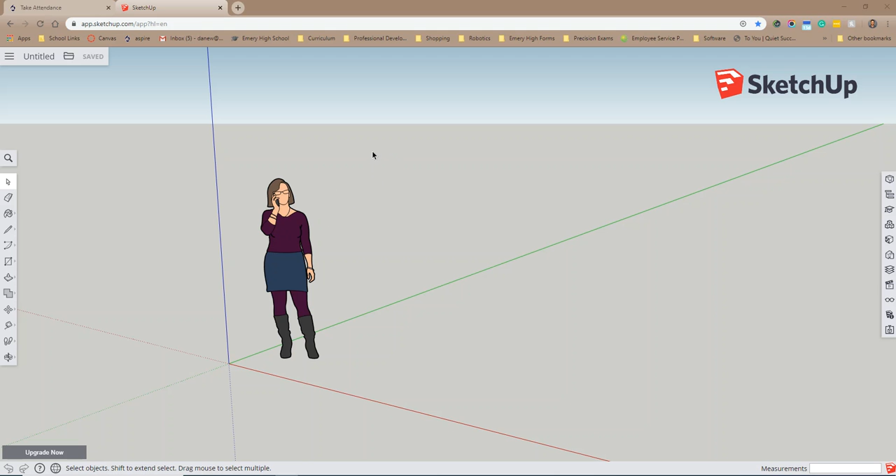To start out with, they have a sprite. You can delete that sprite by clicking and dragging a box from right to left to select it, then pushing the delete key on your keyboard.

Alright, a couple things about SketchUp: it's free, well this version at least, and it's good for small projects.

On the left, we have our select tool, an erase tool, a paint tool, a line tool, an arc, a rectangle, and if you right click on these, or just click the arrow on the right, it'll give you more options. So we have all these different tools.

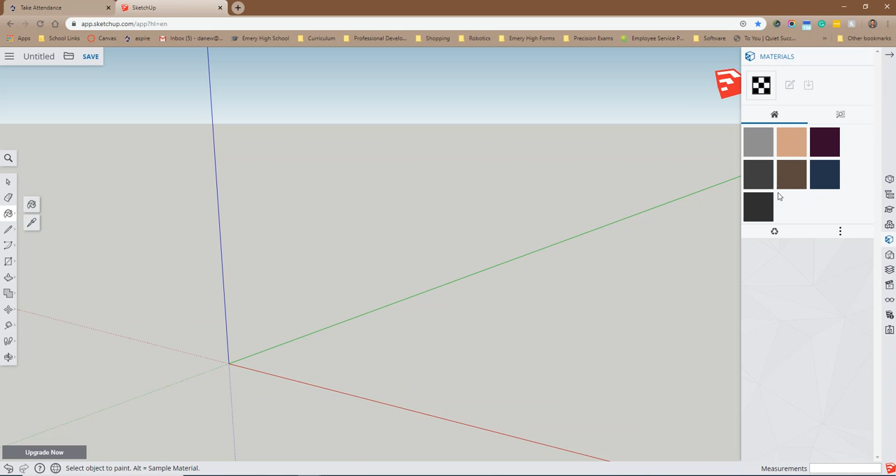When you select a tool, like say I selected the paint bucket, it'll give you some options on the right regarding that tool. I can select some different colors here, or even find some materials to use.

Okay, so to navigate, I'm going to hit the select tool here. Just to zoom in and out, you scroll with the scroll wheel in and out.

To pan, you have to click down here on this orbit tool and select the pan option. This is the only thing I don't really like about SketchUp, that you have to go over here to pan. Maybe there's a shortcut, I don't know if there is, let me know. But now I can pan. If I click the scroll wheel and hold it, I can orbit.

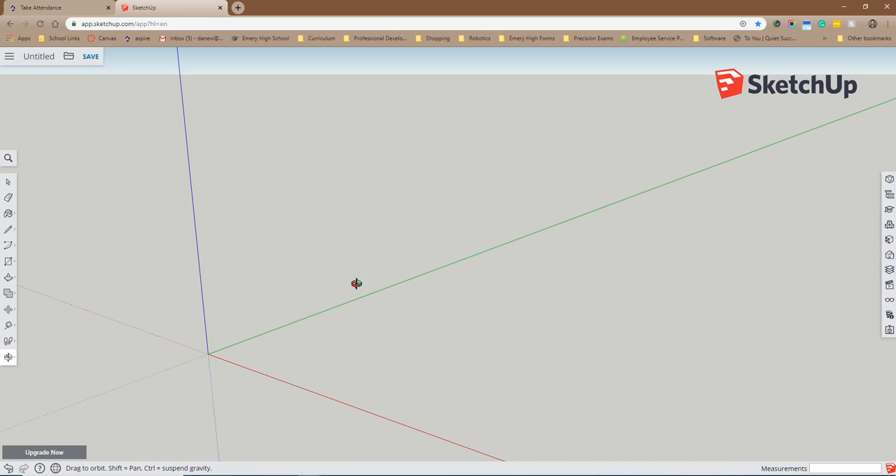So that's a little bit about navigation. Okay, so let's talk about our design that we're going to be doing.

Here's just a rough sketch that we made, very rough, with some rough dimensions. We're making this doghouse for a mini Aussie, and we looked up the sizes recommended for a dog that size. We came up with a 24 inch by 30 inch by 36 inch structure, with a 12-inch door.

So this is a rough idea here, and it has a gambrel roof, kind of like the old barns that had two pitches. Very rough, the annotation isn't right or anything, just to give us an idea.

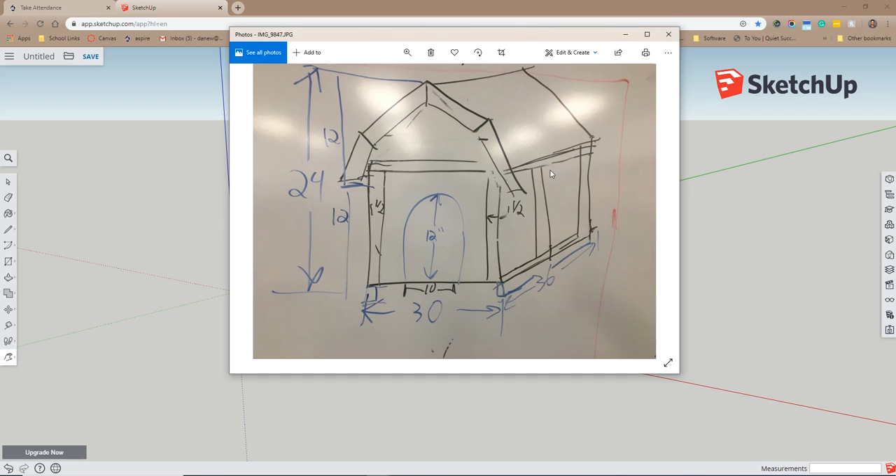For a structure like this, we're going to want to start by making a floor, and the floor will consist of joists and a rim joist to hold it all together. So for example, here's a floor, with a rim joist that the joists will nail into, on each end of our joists, and this will be like a platform frame where we'll build off of this.

We'll be able to have some insulation in here. It'll keep the house up off the ground, so we won't get the cold from the ground or the heat from the ground coming up into the doghouse. So that's our goal, is to make this part.

Okay, so to get started, what I like to do is scroll in, zooming in to where all the axes meet. There's a green, blue, and red axis. We want to start drawing. I like to use the origin here as my starting point, so I'm going to select the pencil tool.

Before I actually click and start drawing, we need to know the size of our wood. We decided to make this really lightweight, and we didn't want to use 2x4s, so these are 1x4s. If you look at the actual size of them, here's a little chart. A 1x4 is not really a 1x4, just like a 2x4 isn't really a 2x4.

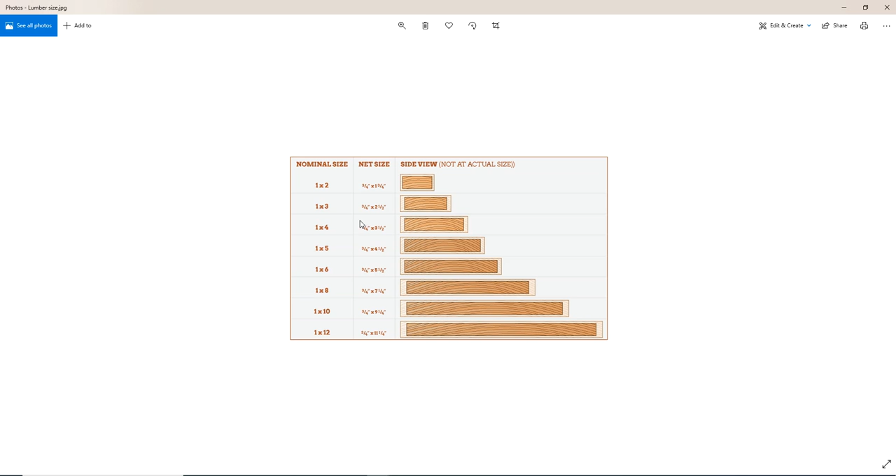A 1x4 is actually 3/4 inch by 3.5 inches. So those are the dimensions we're working with for our floor framing, with the joists and rim joist.

So let's go back to our sketch. We'll start by drawing our first joist. If I click and let go on the origin and drag up, you can see that there's a line kind of following my pencil around. That line is on that blue line. You can't really see it. In the bottom right, it's giving me some length options. So if you look as I move it, it changes.

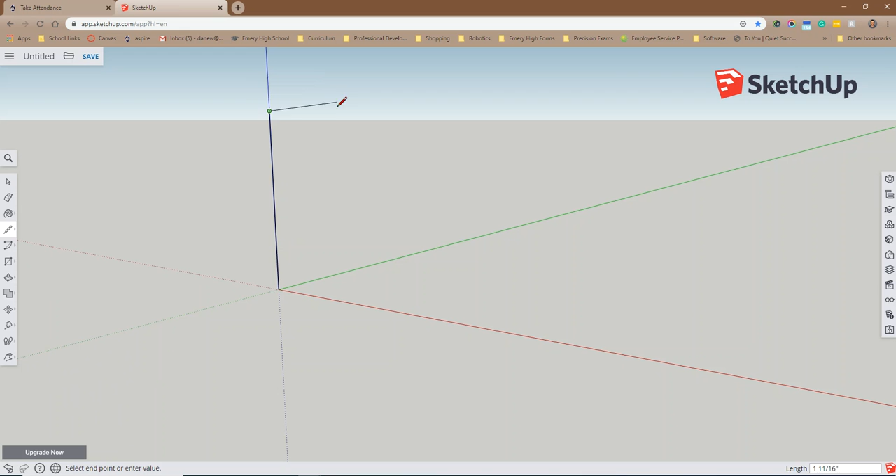We want to set our length, which for a 1x4, it's not really 4 inches. It's going to be 3.5. So I could type this as 3.5 if you look in the bottom right. Or I could do 3 space 1/2. So either of those will work, and then hit enter. Okay, so it drew, and I'm zoomed in enough that it looks like it's really big. That's because I'm zoomed in. If yours is small, then zoom in a little more.

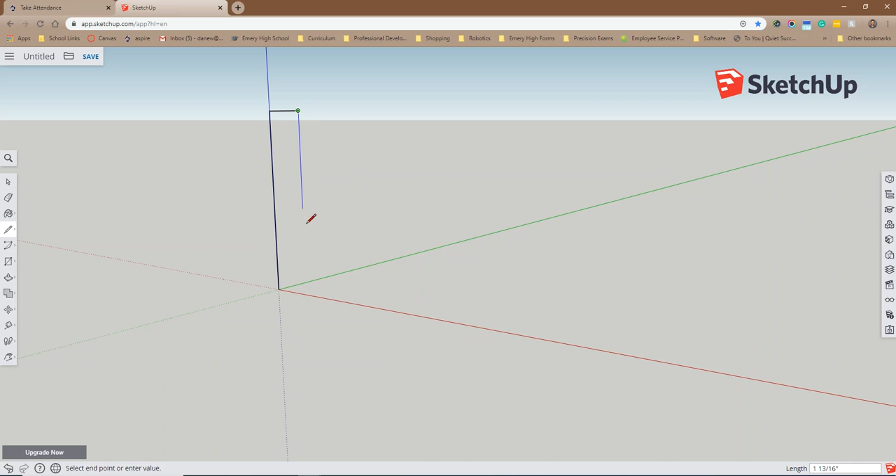I'm going to go to the right till my line turns red. That shows that it's following this red axis below. And we're going to make the width now, which is 3/4 of an inch. So once again, I could type 0.75, or I could type 3/4 and hit enter. Now I could type in again the length, or I could just go down until it snaps to this axis, and then I could click and snap it to where we started.

When I connect all those together, it makes one solid polyline, and it fills in the center. If it didn't fill in the center, it means that there's a gap somewhere. It's not a closed loop. So this is what we want, this closed loop that is 3/4 inches thick by 3.5 inches tall.

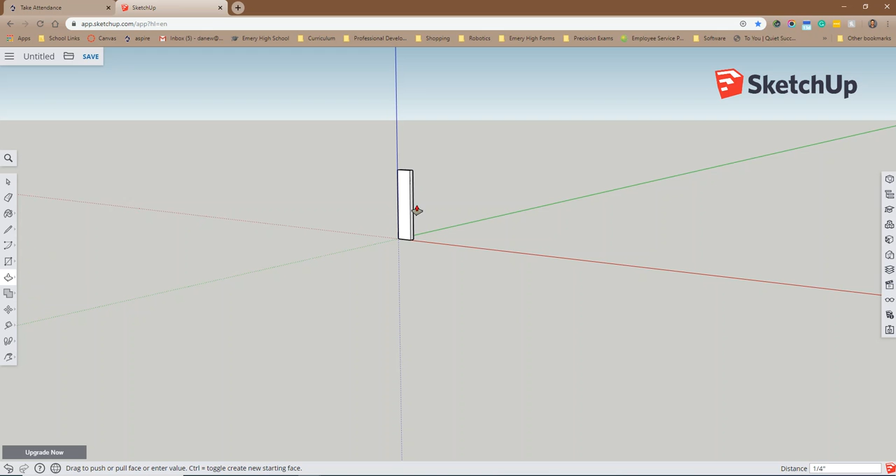Now that we have that, we can actually extrude our board. So I'm going to come over here to the left, and there is a push-pull tool that allows you to extrude. So if I click on that and select the blue area, click and let go, I can now push or pull that shape into a three-dimensional object. Now once again, in the bottom right, it's showing us a length here. If you remember back to our original drawing, we're doing this one here, so the length is going to be 36 inches. So I'm going to type in 36 and enter. And now I have my first board.

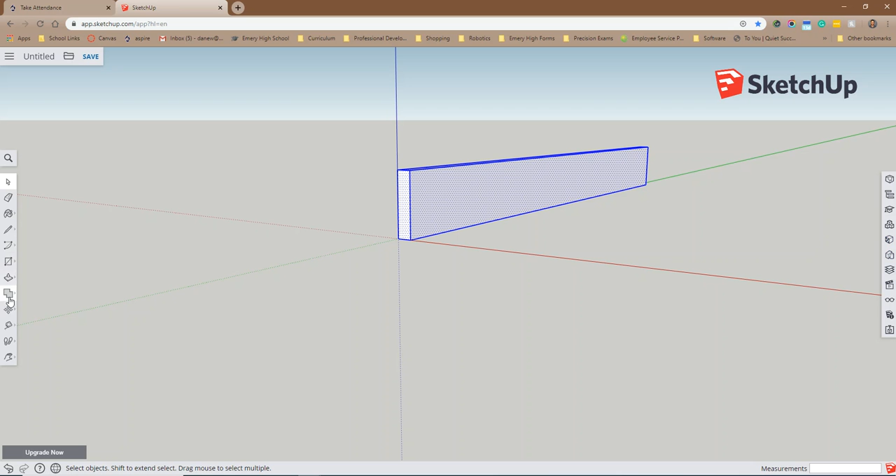Now, not quite done yet with this board. What I want to do is do my select option on the left, click and hold and drag a box from the right to the left till you've selected the entire board, and let go. It'll select everything. And we want to go over to our left and pick the paint bucket, and then to our right, and yours might look like this. Then you select over here in the browse, and you scroll all the way down to the W's, and we find wood, and we scroll down some more, and it gives us some wood options. We'll just pick the one in the bottom right.

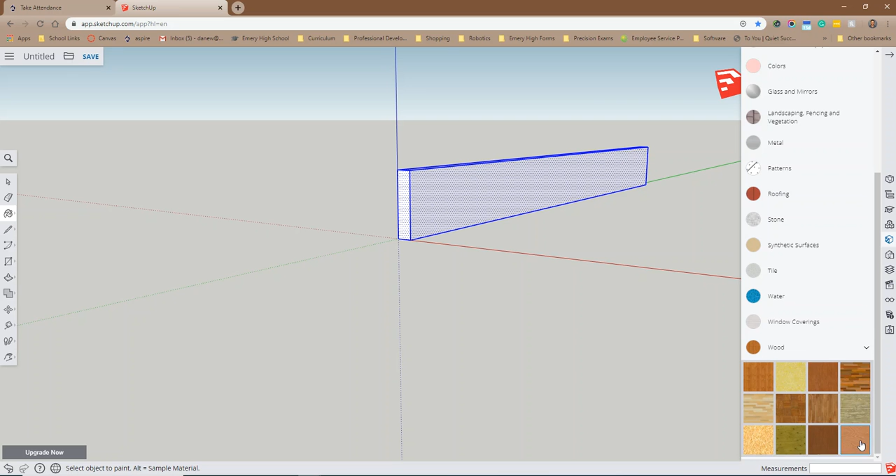Then after you've selected that, you click on the actual board itself with your paint bucket. If I click in my scroll wheel and hold it and orbit, you can see that it painted the entire board. So that's good. I'm going to scroll back up and exit out of this and go back to my select tool. As you can see, it's still selected. If not, reselect it. I'm going to right click on it and say make a component.

Now this component is 1 inch thick by 4 inches tall by the length, which is 36 inches. 1 by 4 by 36. Or we could do 1 by 4 by 3 feet. If you want to get real technical, you can put in the inch symbol, which is just left of enter. If you hold in shift and push the key left of enter, you could put in your inches. But I know what it is. I don't want to add more stuff than I have to.

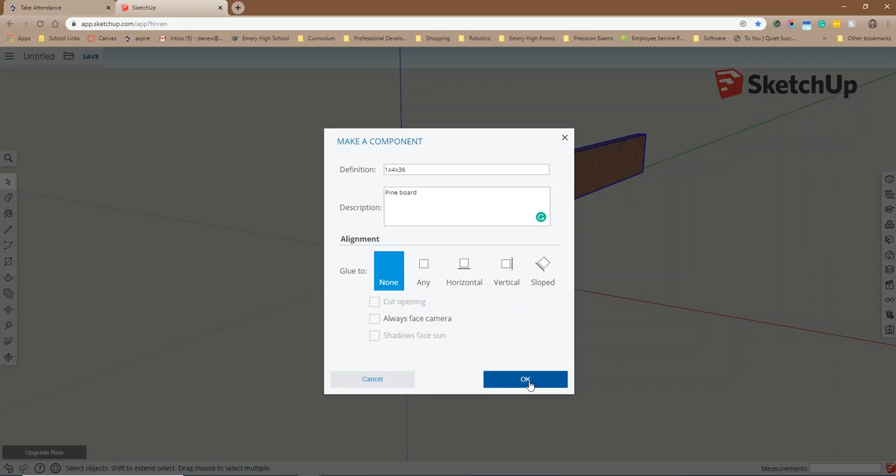And you could say it's a pine board, or if you want to do a description you can, but you don't have to. Okay, so I hit OK. What that does is it combines everything on this, so now it's one solid board.

Okay, so now that this component is done, we want to duplicate it and make one more, because in our design we're going to have 2 of these rim joists. So it's still selected. If it wasn't, I could drag a box or click on it and select it, and you want to right click and say copy. Then you want to right click again and say right here, paste.

Now it wants you to select a starting point. So I want you to start right there on the corner of that last board that we just made and click there. Now it's going to space it a certain distance from that. And we can type that distance down here. So I actually got to click it twice and then it'll go. What we need to do is figure out what that distance is.

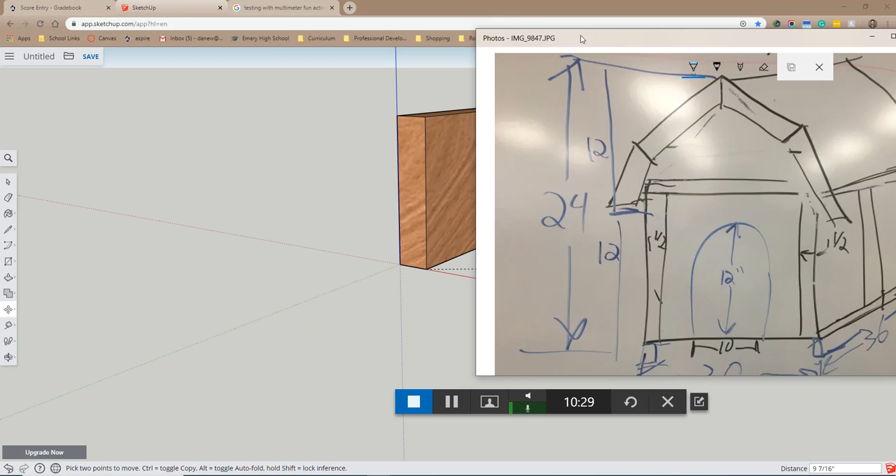So here is our rough sketch, and if you look, we just made these two end boards, and there's going to be a board in between them right here going this way. So we know that this distance we want is 30 inches, but we need to subtract the thickness of, well, let me draw this out so you can see it a little better. So right now we've drawn this one, we've copied it, and now we're going to space it over here. And we know that the distance between the edges, so this edge and this edge, needs to be 30 inches.

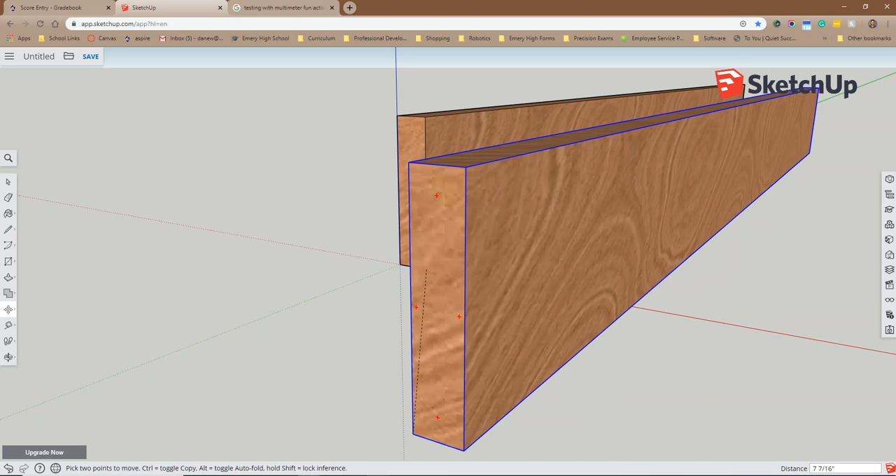So if we look at our board here, what is the space between these? From this corner to this corner, what's the space we need in between them if the whole thing needs to be 30? So we need to subtract the width of these boards. Well, we know this one is 3/4 inch thick. This one is also 3/4 inch. So if we add 3/4 plus 3/4, we get 1.5.

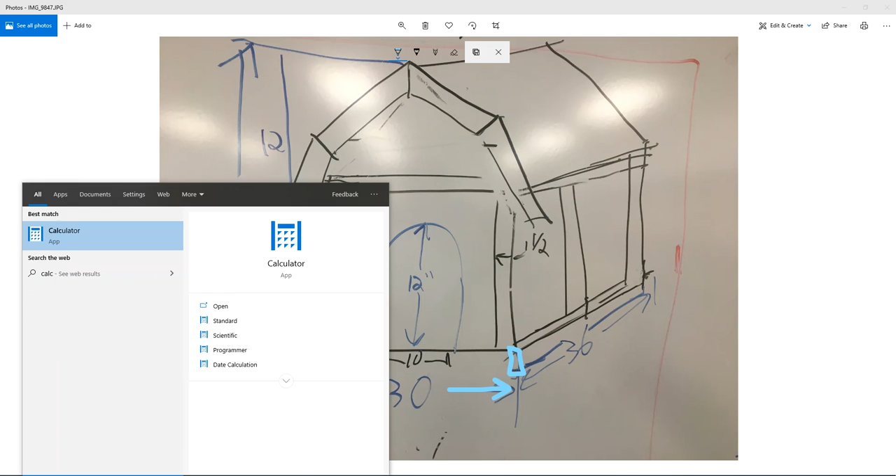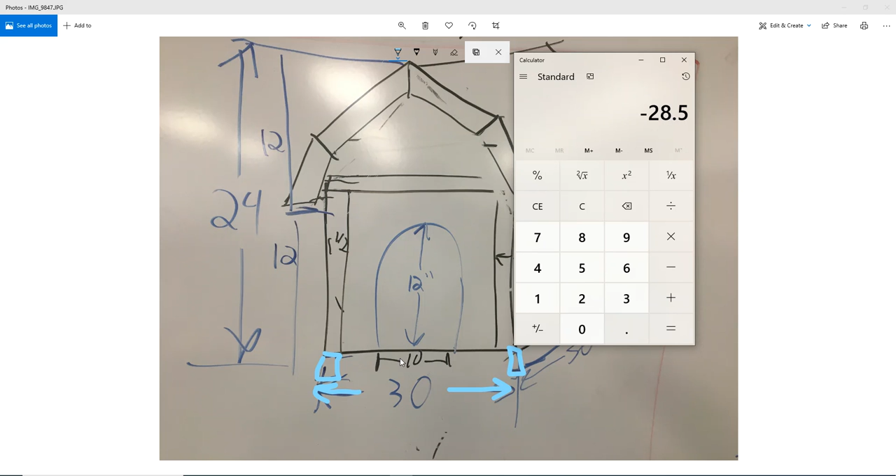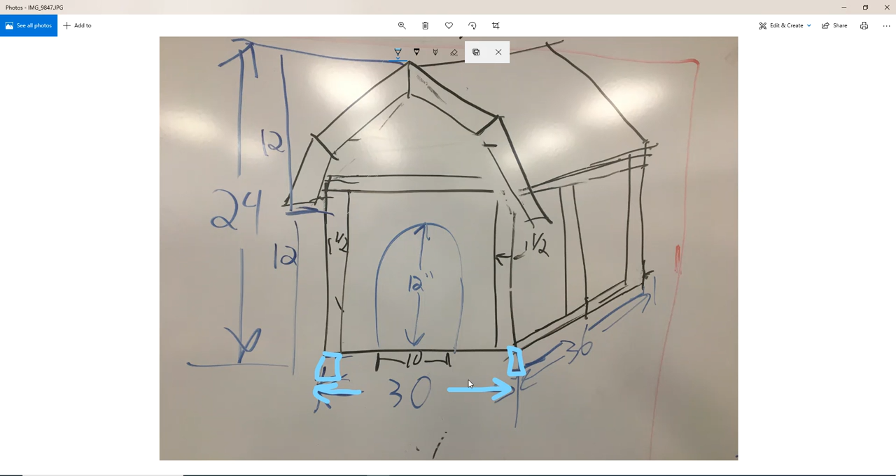So if I pull out my calculator, I'll show you the math on this. 3/4 is 0.75 plus 0.75, so it's 1.5, and we're going to subtract that 1.5 from our 30. So we're going to go minus 30. It's going to give us a negative because we kind of subtracted backwards. That's okay. So it's 28.5. So we know that the board in the middle here needs to be 28.5. So we need to space them 28.5 from this corner to this inside corner. From inside to inside. So we need 28.5.

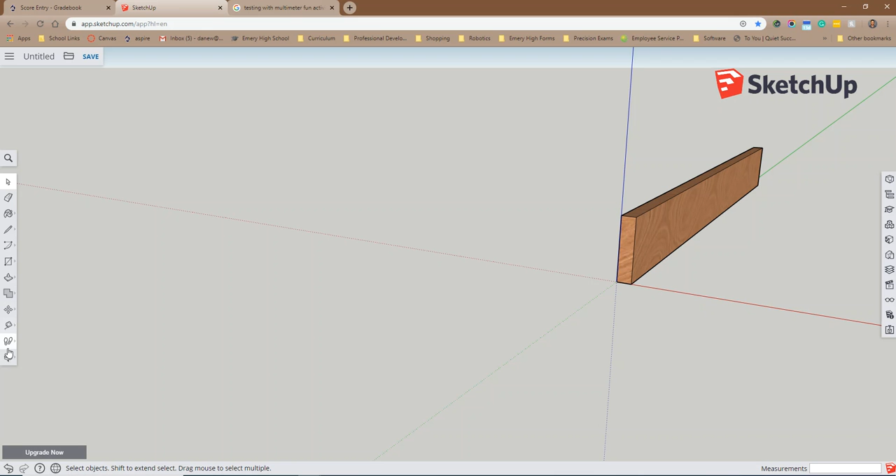So I'm going to make sure it's on the red axis, and I'm going to bring it over this way just a little bit, and then I'm going to type in 28.5, and I'm going to hit enter, and then click my select tool, and then I'm going to scroll out, then come over here and pick my pan tool, and right there, those are spaced 28.5.

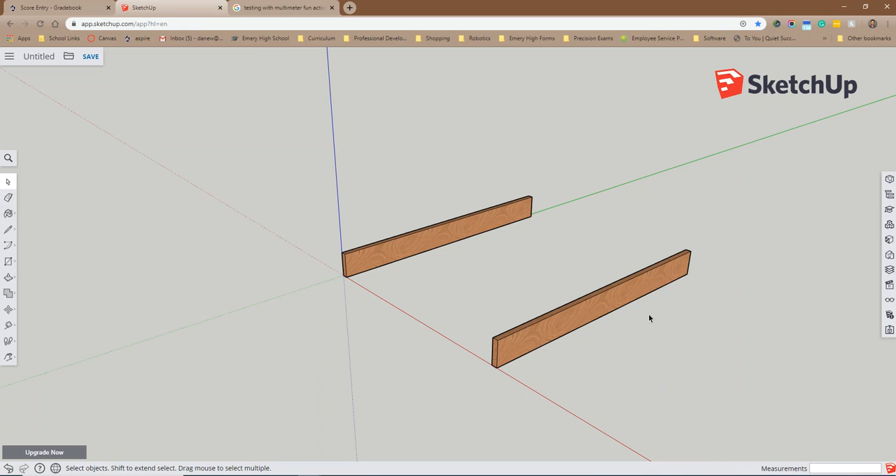Okay, so we're getting close to finished here. What we need to do now is add our floor joists in, so they're attached to our rim joists, and we have one solid structure. So here we go. All we gotta do is just draw another one, and you can actually draw it on the face of this one. So if I click down here in this corner, I know it's the same height, so I clicked and clicked. Then I'm going to go over. I know that it's also 3/4 inches, so I type that in, hit enter.

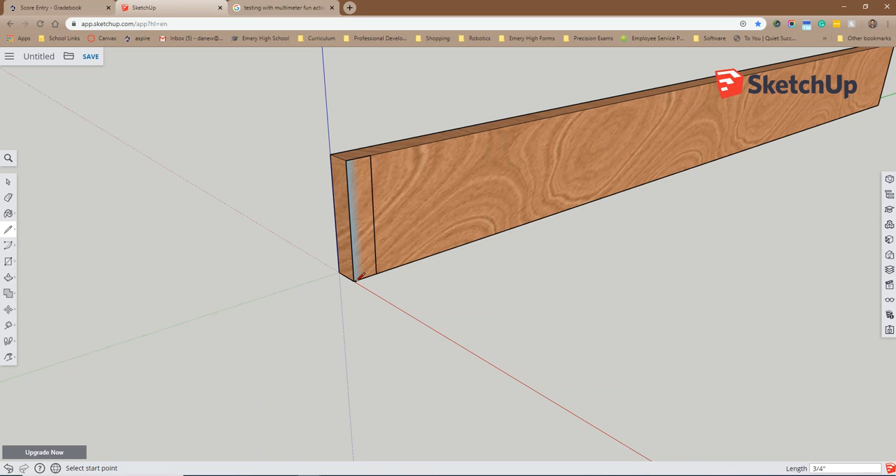Then I'm going to go down, and here's a little shortcut or a little trick. Your arrow keys lock in the axes. So let's see, the up arrow is the blue one, and that's what we want. So if I hold in the blue one, it's going to try to keep it there on the blue. So it tells me that it's straight up and down. And I'm going to click down here. Then I'm going to close that loop, and it should give me a polyline, and it also should change color. So if you look, it changed color.

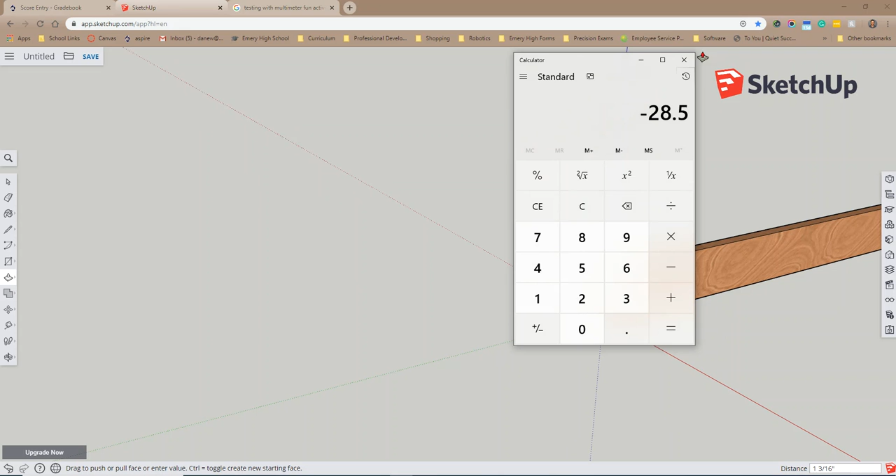Okay, so now all I need to do is extrude that, or push-pull, use a push-pull tool. So I'm going to scroll out. I'm going to select my push-pull tool. I'm going to select this inside of this, and I'm going to type in, what was our number again? 28.5. So I'm going to type in 28.5. If we did our math correct, it should line up perfect. I'm going to hit enter and scroll out.

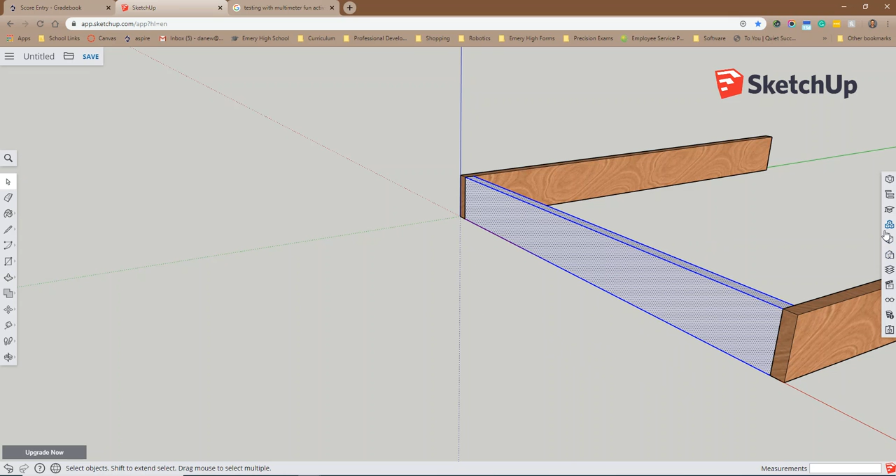Now if you scroll out and then point your mouse over here where you want to look and scroll in, it'll kind of adjust your screen. Or you can get your pan tool. So yeah, that looks good. Now we just need to do the same thing that we did to our last one. We need to select it by dragging a box, and we need to change the material. So I'm going to go to the paint tool, and it's already up here, but I think it has you pick it again. So I'm going to pick it here and click on it.

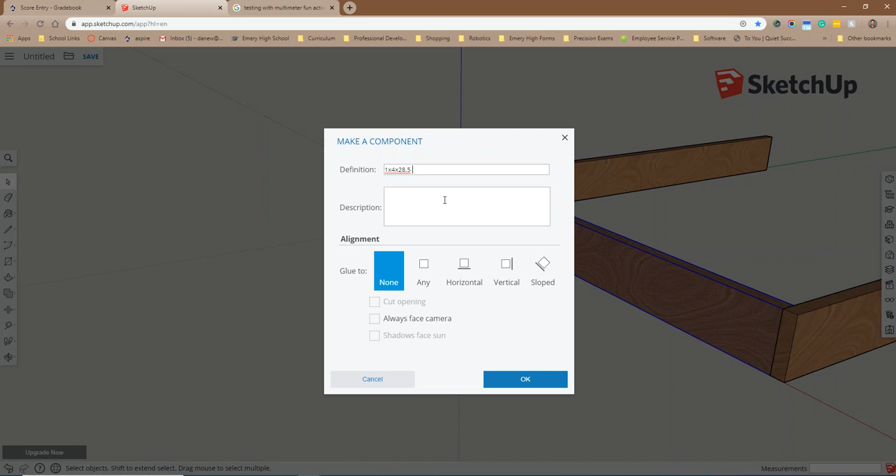Okay, get my select arrow, scroll up and get rid of this. I'm going to right click on this, and I'm going to make a component, and I can call this one my 1 by 4 by 28.5. And if you want to, you could say floor joist. Okay.

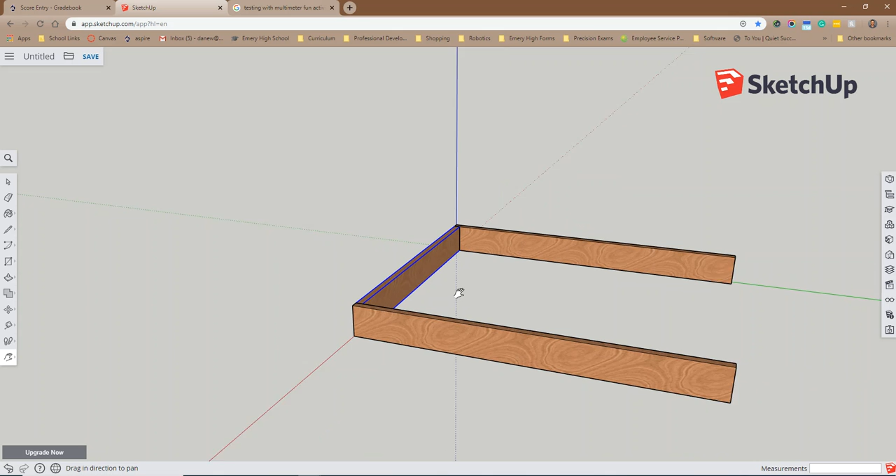Alright, now if you're framing a real house, you would want to have a board at 16 inches on center. But since these aren't 2x4s, and this isn't a full-size wall, and we're not using full sheets, we're just going to make them evenly spaced. So we got to figure out, if this is 30, what was this? Let's look real quick. 36 inches long. How far do we have to space these boards if we're going to put 2 boards in the middle? So you can figure that out by dividing 36.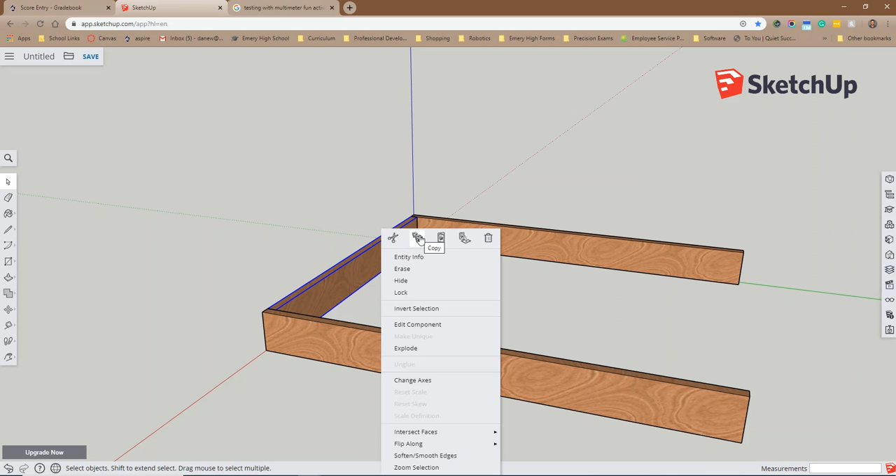36 divided by, if you want it in thirds, divided by 3 would be 12. And then you got to subtract the thickness of these. So there's some stuff we have to do. I figured it out for you, so I'll just do it for you, and you can follow along. But before we do anything, we want to make a copy of this and put one here on the end. So I'm going to right click and say copy. I'm going to right click and say paste. And I'm going to snap it.

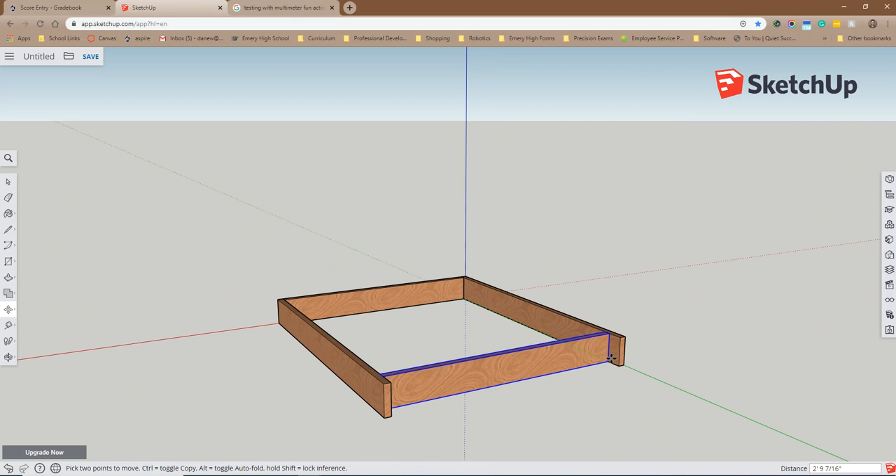Let's see here. I'm going to snap it. It's kind of hard to see, but if I click my scroll wheel in and orbit, you can actually snap it to right there. That's easier to do. So I snapped this bottom corner, and then it's going to move from there over. So I'm going to go ahead and click one more time, move my board. Okay. And orbit, it takes a little getting used to. I'm going to scroll in, and actually it would have been easier for me to snap it on the inside corner. Well, let me just do it from the inside corner.

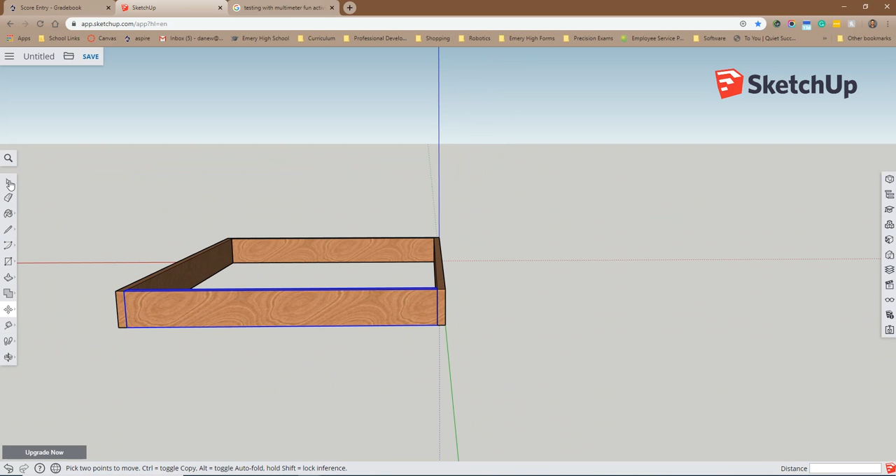Okay, so I'm going to snap it from this inside corner right here. Okay, now I can snap it to the outside corner and it's going to line up perfect. So if I scroll in and I select this outside corner, and don't be afraid to zoom in so you can see this. It should be perfect. Okay, I clicked and it snapped to there. I'm going to do my select arrow. Okay, that looks good. I just clicked off to deselect it.

Now we just need to do 2 more and we're done, so bear with me. Here's how we're going to do the next 2. They're going to be 11 inches apart from inside to inside. So here's a trick to do this. You can get your tape measure. So I select my tape measure. You can click right where these 2 meet on this point, and then you can bring it to the right, and you can type in 11, enter.

And I don't know if you saw that, but it put a little guide here. You see that little tiny dot? It's a little guide. So then I can get this board again, click and drag over it, and right click and say copy, right click, paste, and I can snap it to this corner in here, and then I can bring it over. So one more time, and I can bring it over and snap it to that line. To that guide point.

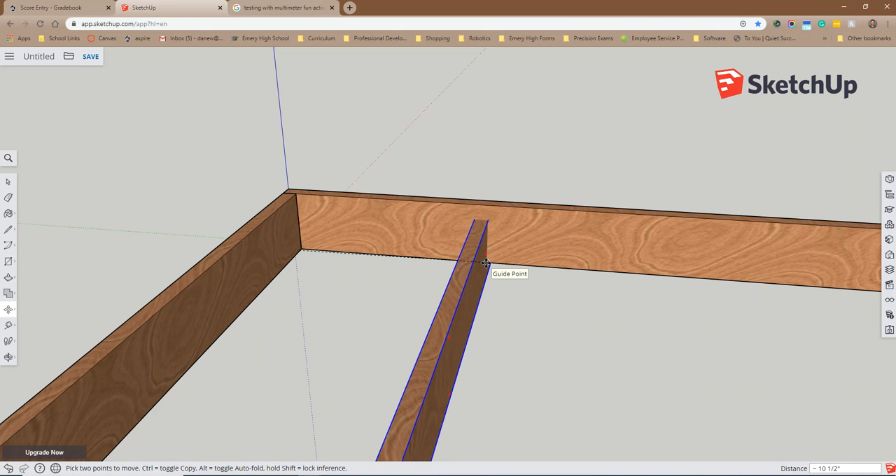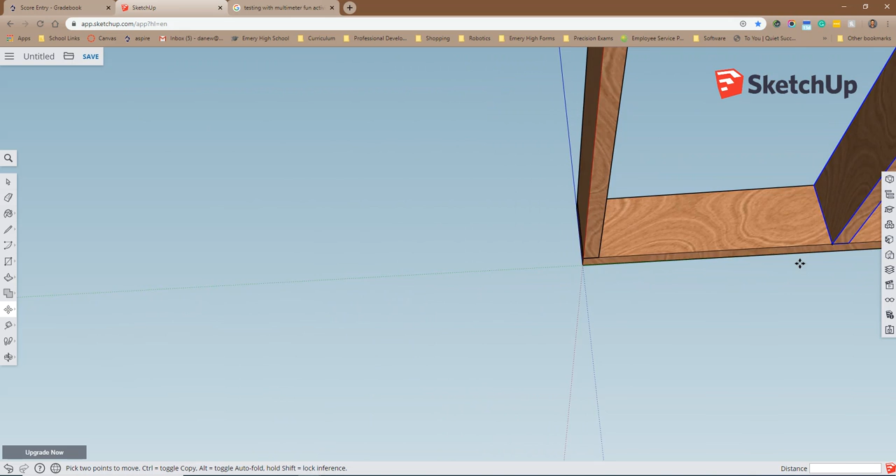And you know what? I did that wrong again. That's alright though. This will be good for demo purposes. So what I want to do is I'm going to go underneath and I want to snap it right here. Okay, so I'm going to snap there. Then I'm going to move it over and I'm going to snap it there. Okay, so you got to kind of figure out how to work those things, and snap it to the right ones. I'm going to go ahead and pan.

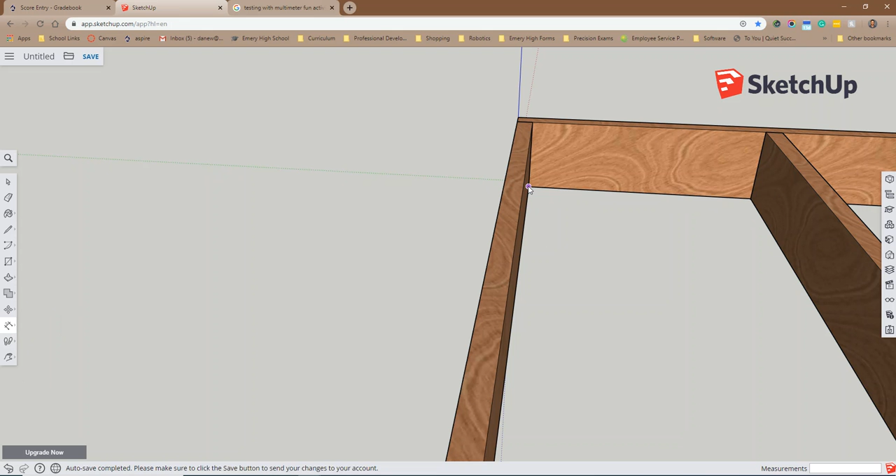Okay, so if I were to measure this, it should be 11 inches. So I'm going to get my measuring tape, and I'm going to snap it right there in that corner, from there to there. And if you look down the bottom right, it tells us that's 11 inches. You could also click on this and do a dimension. It would show you how far apart these things are. So I could click there and there and show that, hey, that's 11 inches between those two.

Okay. Alright, so one more to go and then we're done. Thanks for hanging in here with me.

I'm going to pan. And we want to do this one over 11 inches. And I could go from here over 11 or here over 11 because they're all going to be equally spaced. But it's going to be from this inside to this inside. So I'm going to pick my measuring tape once more. I'm going to make sure I snap right there. I'm going to go over and I'm going to type in 11, enter, and it gives me a little guide point there. Now what I'm going to do is get my select tool, click and drag a box.

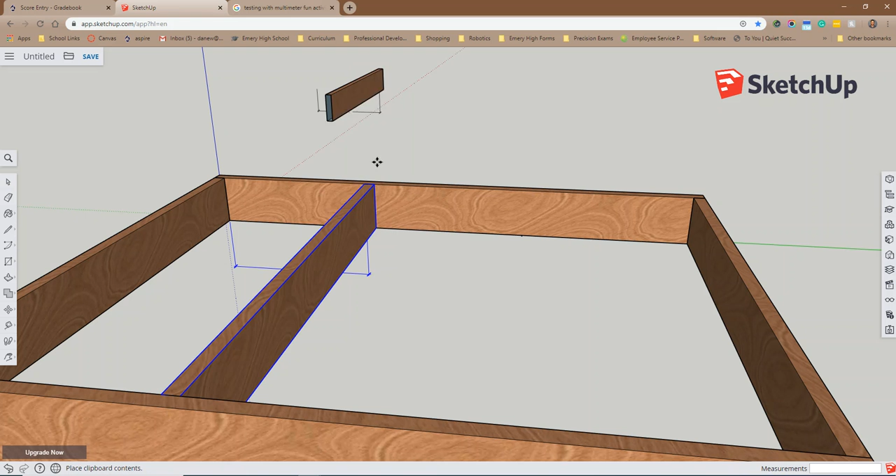Now if you click and drag to the right, it doesn't select it unless you have the whole thing in that selection like that. If you just have part of it going to the right, it won't select it. But if you click and drag to the left, it'll actually select the whole thing. So if I click and drag to the left like that, it'd select this whole board. Okay, so I selected it. I'm going to right click and say copy, right click and paste. Now there are keyboard shortcuts for this that would make our life easier. For now we're just going to use those tools.

Okay, and once again I'm going to orbit by clicking in my scroll wheel. I'm going to snap it right there. You see that snap point I made? I'm going to click it one more time. I'm going to bring it over. Now let's see here, is that it? Yeah, that's it. So I'm going to snap it right to my little guide point. There it is. Snap.

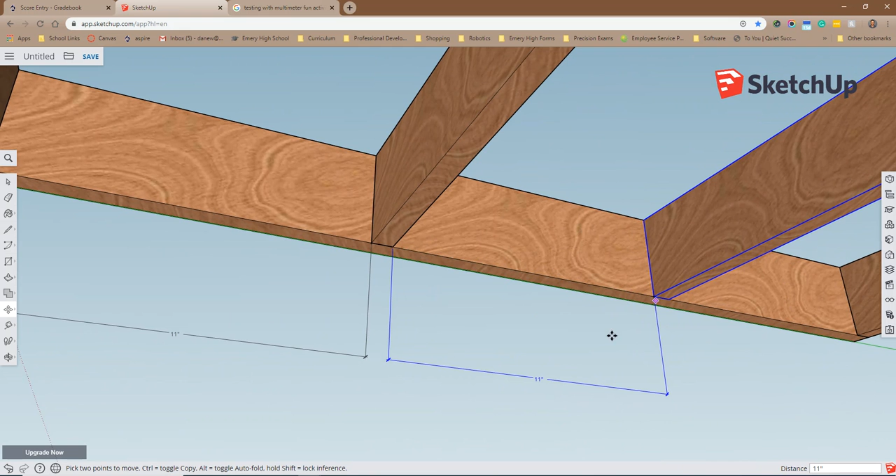And now, whoa. Okay, we lost it. Where'd it go? Okay, I'm going to click. Alright, oh there we go. I don't know what it did there. That was weird. Zoomed way in on me.

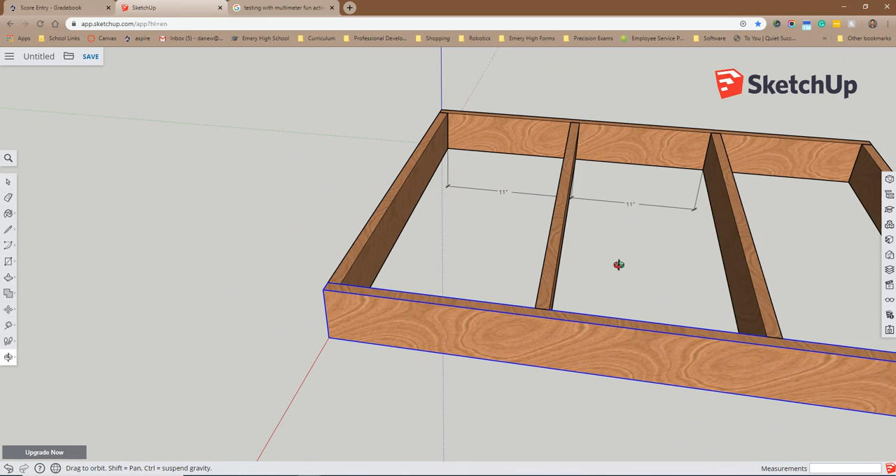But if you look here, it actually added another dimension, and it shows us, hey, yeah, that's 11. So if we did it right, it should be 11, 11, and 11. So I'm going to add one more dimension just to double check that this right here, from this point to this point, is also 11, which it is. Okay, and that's it. So get to this point and make sure that you save it.

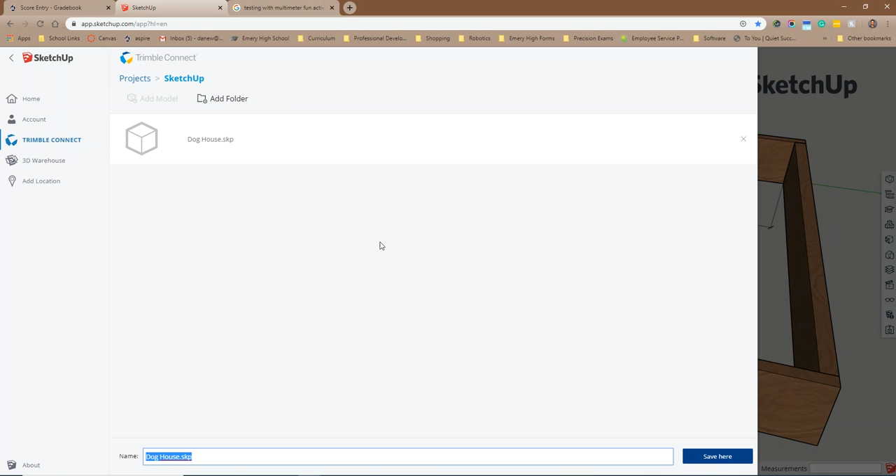And go on. So I'm just going to click Save, SketchUp, Doghouse, Save. I'm overwriting one, but you can make a new one and call it Doghouse. And say yes. And then move on to the next video.